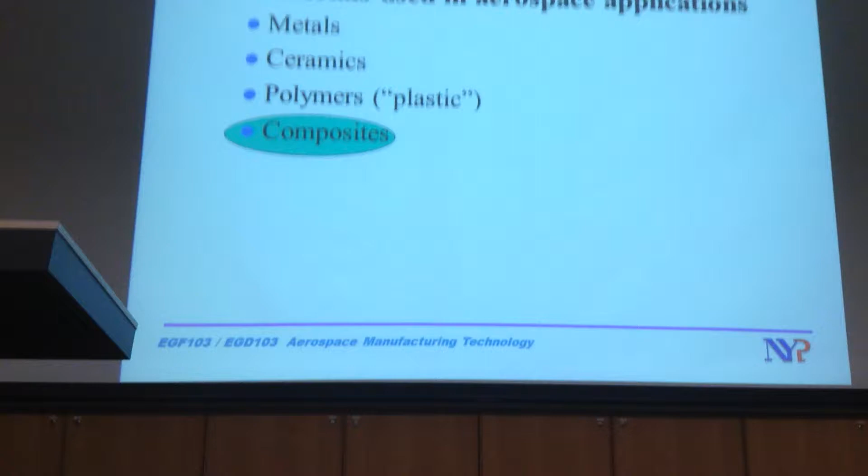Composite materials: normally when you want to build something, that product is called a structure. The product is a structure, okay? And then the material we use is composite materials. A composite material can be just like a sheet of paper, okay? And then you use that paper to construct it into a structure.

Okay, and basically composites are materials that consist of two or more constituents. Okay? And what we are interested in is the properties of the combinations of the materials. Okay, we are taking the best of each of the materials, the best properties or characteristics of each of the materials.

Oh my gosh, it's so cute.

And there are many composites around us. It's not new. But for aerospace, the composite materials they use are very narrow. Okay, but for general composites, it's everywhere.

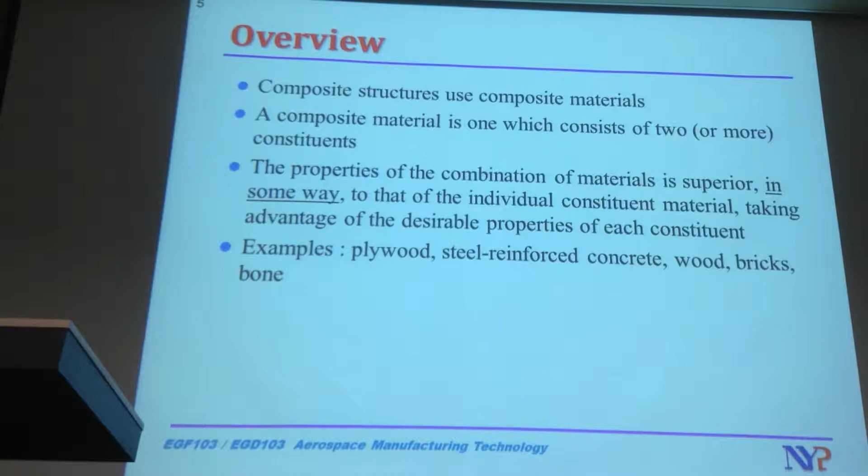A piece of plywood is a composite material. The bones inside our body are a natural composite. Okay, the tires they use for automobiles are a composite material. In fact, it's a very complex composite material. Okay, everywhere is composite material.

So for aerospace, if you are just looking at aerospace, the usage of composite materials has increased a great deal. Okay, starting from 1975, only very little composite material was used.

Hey babe, we should walk through the bay a bit.

Only very little composite was used in the 70s. Okay, progressively until now. Okay, the 787, the Dreamliner, has 50% composite materials.

What's the Boeing 787 in the chart? Hey, wait.

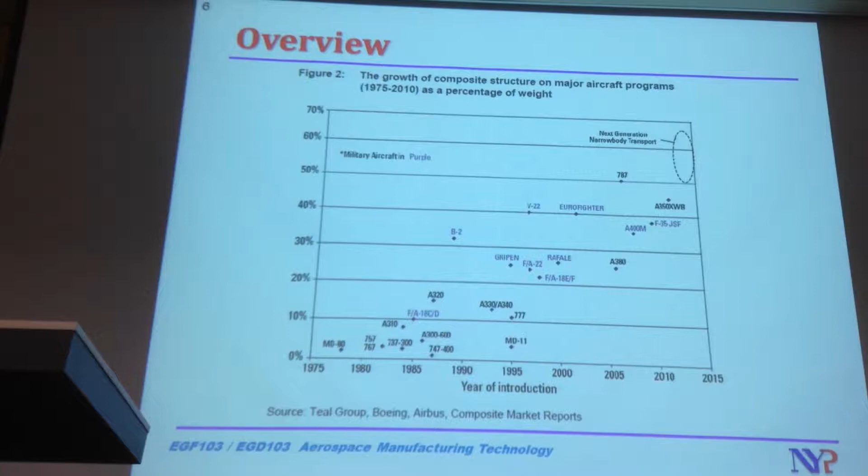Okay, 50%. So you can expect what happens to you if you were to take the plane and then it bursts into fire. Okay? Or if there is a crash. If you crash with the old plane, more likely the passengers in the old plane have a higher chance to survive than in the high-tech one. Because of a lot of composite materials.

Composites are more fragile. Fragile, yes. When you see a Formula One car crash, it just disintegrates into pieces. And then if there is a fire, it turns into ash. Is carbon fiber alone a composite? No. The definition is two or more materials put together.

F1 cars use carbon fiber. Yes, the reinforcement is carbon fiber, but they need glue to put them together. Then it becomes carbon fiber plus the glue, the epoxy, and it becomes a composite material. And they are using this type of material on the plane.

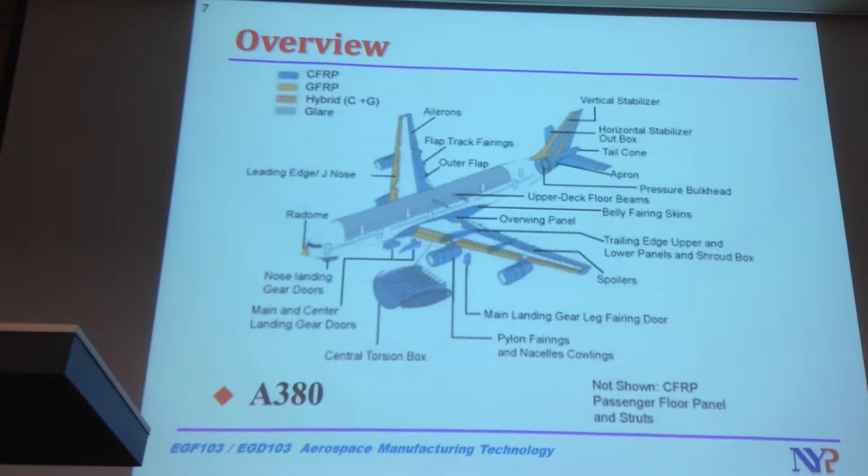Okay? So, yeah, your notes have no color. What the hell? Okay? But if you want to look at the color, you must go into the blackboard.

CFRP, carbon fiber reinforced plastic, is in blue. So let's look for them. Okay, quite a lot. I know how many seats are inside: 583, including the pilot. Carbon fiber reinforced plastic, and then we have GFRP.

I think 3 is for the pilot. Plus minus 5.

Glass fiber reinforced plastic, less. Because it's less strong compared to carbon, and is heavier than carbon fiber. Fiberglass is heavier than carbon fiber. Look at the fiber tip, it's random. So random.

And then there are some areas that may be hybrid. Hybrid means that one layer fiberglass, one layer carbon fiber, then one layer, they just add on like your plywood. Several layers, alternating.

Winnie the Pooh. He wants to give Winnie the Pooh a facial.

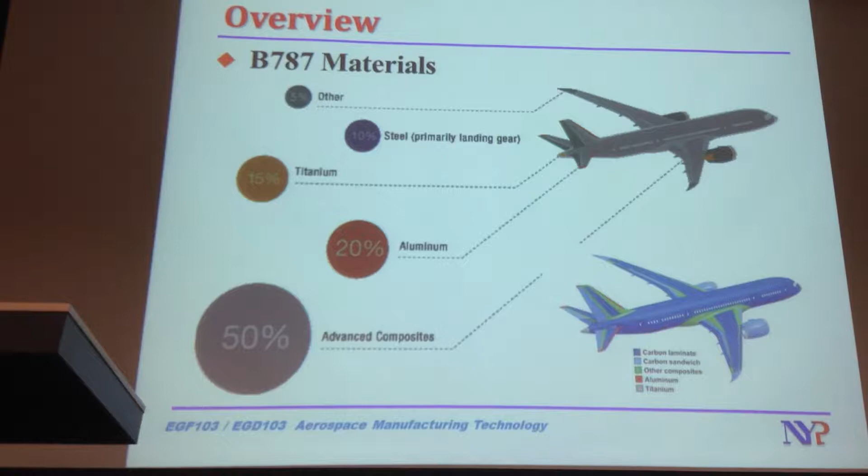Okay, we go to the difference between carbon laminate and carbon sandwich. I mean, not the so direct one. That means it could be a sandwich, or could be a hybrid, or something like that. Not so straightforward like carbon fiber or glass fiber. It could be with something else. There's a term for that.

If it's not that heavy, then how much would it take to lift it? Very funny. Depends on the thrust. No, I mean, what kind of machine would it take to lift it to the plane? This one, it looks big, but not as heavy as you can imagine.

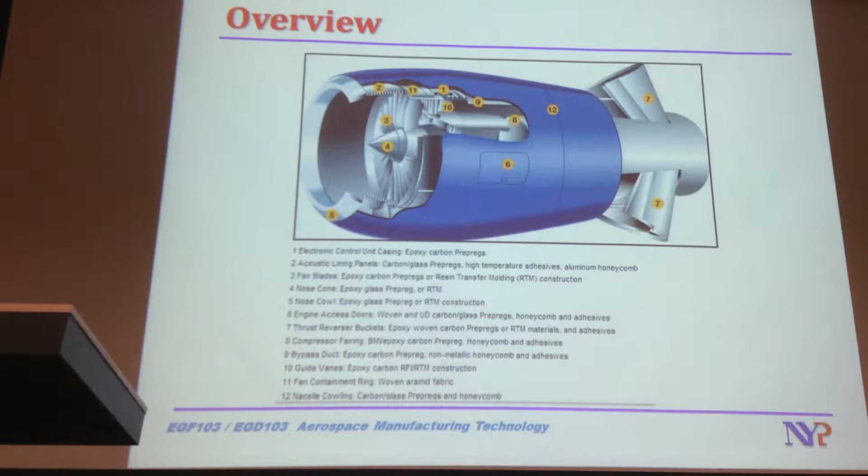So for plastic parts, we treat it like metal parts as well. We have to look at what properties we require, then find a suitable material for it. Sometimes we want it to be high modulus, that means very stiff. Sometimes we want high tensile strength. Most of the time we want a low density, because lightweight. Most of the time they use composite material because of the lightweight. The main reason to use composite material is they want it light.

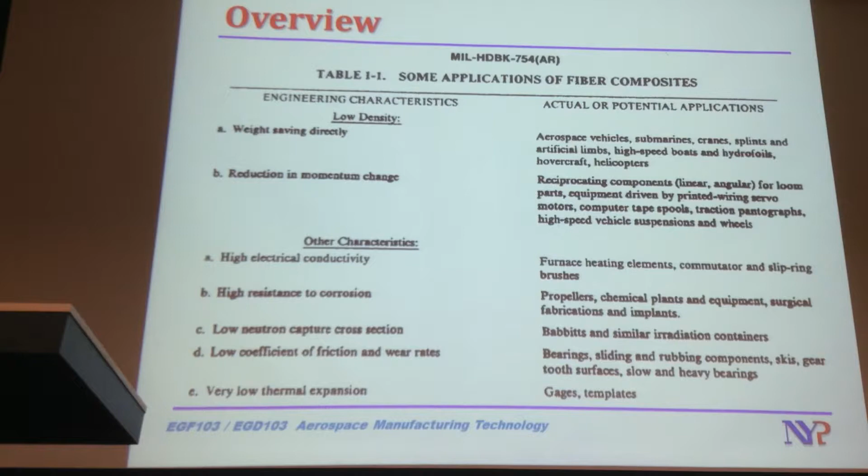Okay. So what are the advantages? Okay, I must apologize to D2. D2 will have tutorial on Thursday, so they have not seen the composite material, whereas the other two groups have seen it. Deformed already. This is the diamond made by the carbon fiber. See this diamond.

They are very light in weight as compared to steel. Even compared to other materials, it still feels very light. Strength and stiffness can be tailor-made to meet the load. That means if you know the load is from this direction, you can put your fibers to face the load. Higher performance for given weight leads to fuel savings, excellent strength to weight and stiffness to weight ratio.

Okay, a greater variety of mechanical properties. I think that one is a circle. It's a parallelogram. Yeah, I think it's a parallelogram.

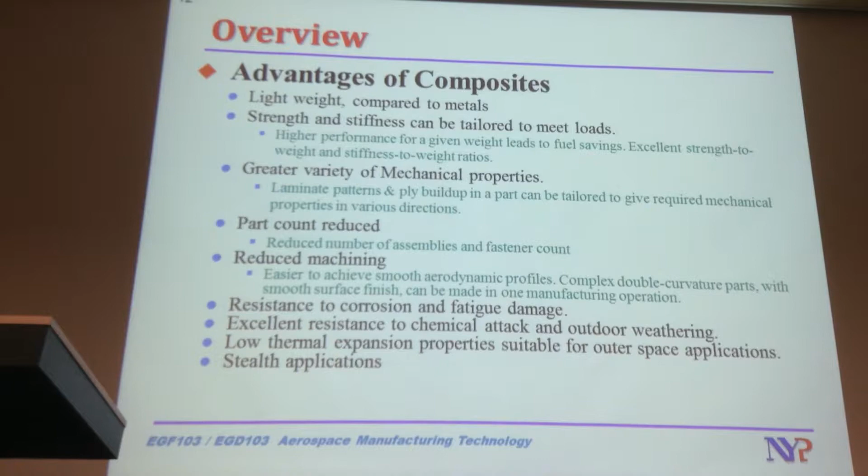Laminate patterns and ply build up. Ply, as in plywood. You know plywood? Plywood is made up of plies, layers, either 5 plies or 7 plies or 9 plies, 3 layers. Ply build up means we stack it up one after another, something like plywood. The build up in the part can be tailored to give required mechanical properties in various directions.

So how do we do it? Simply alternate the ply direction. I will show it to you in a diagram afterwards. Then part count is reduced. That means you are building big parts. If you compare to metal ones, the part count will be lesser. And machining will be reduced.

Basically composite material, which is plastic, is resistant to corrosion and fatigue damage. Fatigue is breakdown after long use from vibration. Okay, excellent resistance to chemical attack and outdoor weathering, because the plane is built to work outdoors, isn't it?

Is there a plane that is built for indoors? I mean, at least for the model toy plane, yes, they're built for indoors. But commercial planes are all built to fly outside. Yeah, correct. Okay, it means outdoor is important, because it's subjected to temperature change, subjected to humidity, and so on.

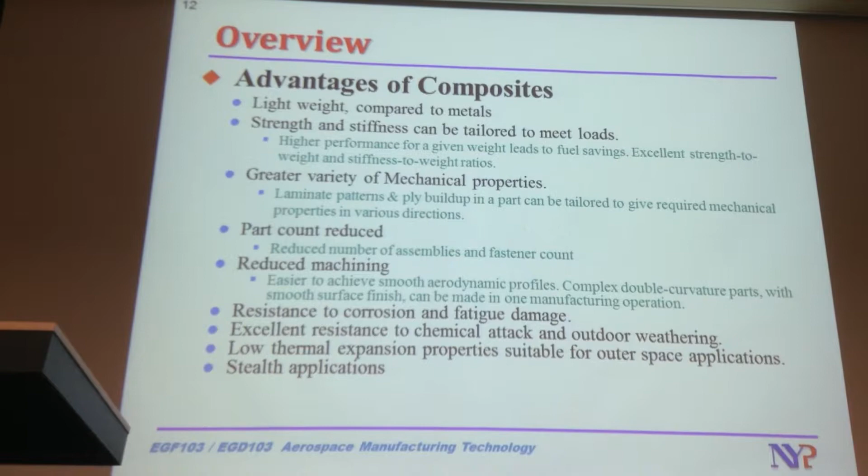Very low thermal expansion properties, suitable for outer space applications and stealth applications. That means it can evade radar. Okay. And then the disadvantages. You seldom see a material where the disadvantages are more than the advantages. Just composite material. Long list of disadvantages.

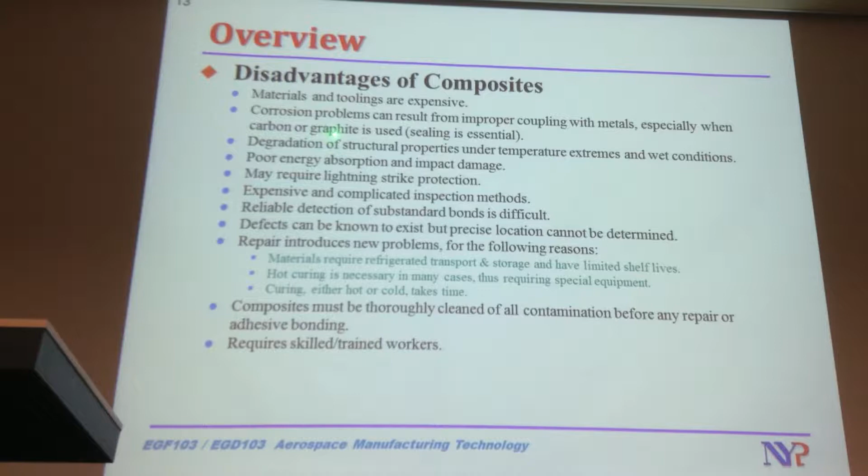If you use carbon fiber and you couple it with a metal, that means if you have a metal that contacts the carbon fiber, then over long use, under some weather conditions, it may cause corrosion to take place for the metal. Don't touch my back. Okay.

Degradation of structural properties under temperature extremes and wet conditions, poor energy absorption and impact damage. If you have a crash, it will shatter. May require lightning strike protection. Is there lightning strike protection in the plane? Yes, to conduct away the lightning. Yeah, there are several. Expensive and complicated inspection methods.

Reliable detection of substandard bonds is difficult. Because when you glue it and you want to see how good the joint is, how do you check? Break it. You break it, that means you never produce the part. So they have to use NDT, non-destructive testing. Sometimes the tool they use is very simple, a tiny little hammer, and they tap on the surface. From there, they can detect whether the part is properly bonded.

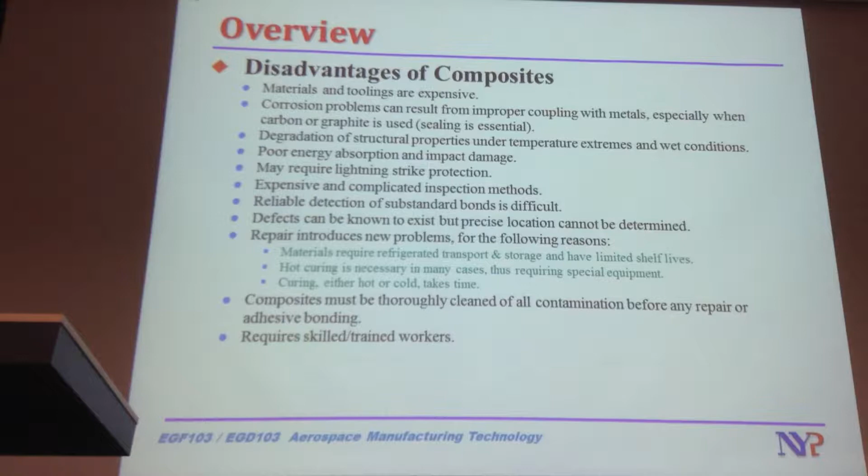And worse still, when you make a repair, the repair makes the job even worse. It can happen for composite materials. And you have to clean it properly before you can use any glue. Then you need very skillful people to work on composite materials. But when I show you the video on composite materials, if it's not in aerospace, it's not so strict. But in aerospace it's very strict when they handle these composite materials.

The resin must be approved by either Boeing or Airbus. It must be approved. Fiber also. And then from a fiber, which maybe looks like a cloth, and the glue, you can make it into products, like this I-beam structure or whatever structure.

So how strong is your composite structure? Or I ask, how strong is the pillar that supports the building? It depends on the properties of the structure and the material you use. One of them is the properties of the reinforcing fiber. If you are using the bar to put inside the pillar, what diameter are you using and how many rods do you put inside? It's important to determine the strength.

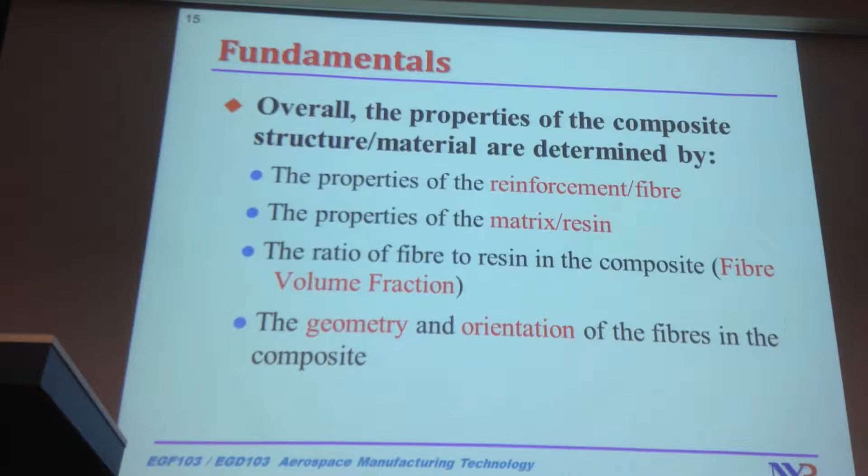Which way you put the fiber plays a part. Which way you orientate the fiber, whether you lay it this way or sideways, plays a part in aerospace. Imagine your fiber is made up of all these lines. This is called a certain angle. For example, I call this 0 degrees. The next one, if this is 0, is 45, isn't it? Then after that comes 90, right? And so on.

In this way, you can make the part very strong in all directions. If you want strength in only one direction, you put all the long fibers to face that direction. But if you have too many layers, say 20 or 10 layers, it becomes thicker but also heavier, and it becomes very, very strong.

But sometimes we don't need that much strength, we just need it to be thicker. In this case, we put a honeycomb in between, which gives you thickness without the weight, then a layer of laminate, or two layers, on top and at the bottom.

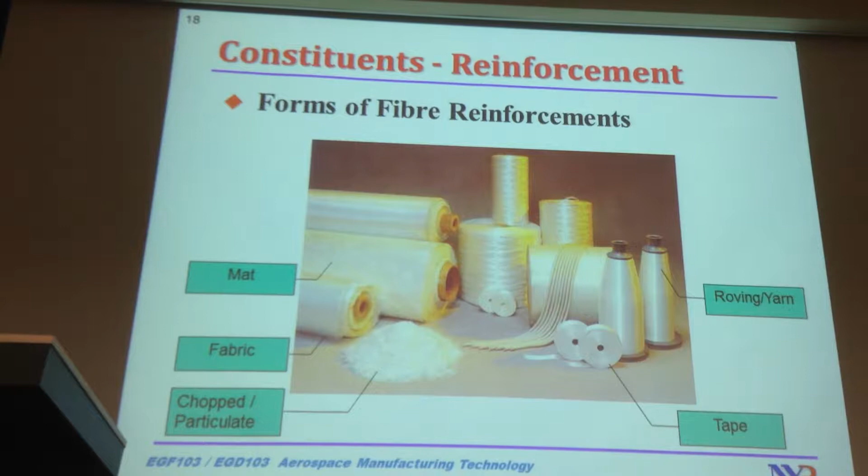So fiber can be of three types for aerospace. We have the aramid, that means Kevlar - the strongest one, which they use for bulletproof vests. It doesn't mean that one strand can stop a bullet, no, it needs other things as well. Then we have carbon fiber, then glass fiber.

So what is the typical characteristic of a sandwich material? Sandwich means we have a honeycomb in the middle. For those who had held the floorboard that I passed around the last two days, was it very light? Yes, everybody agrees it's very light and has high flexural rigidity. When you try to twist it, it resists your twisting, isn't it?

And then it's excellent in thermal insulation - it can withstand heat, not strong fire, but heat.

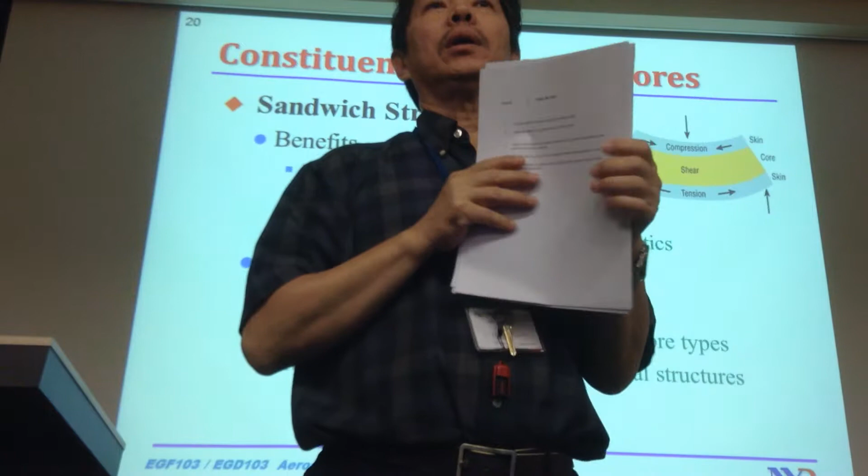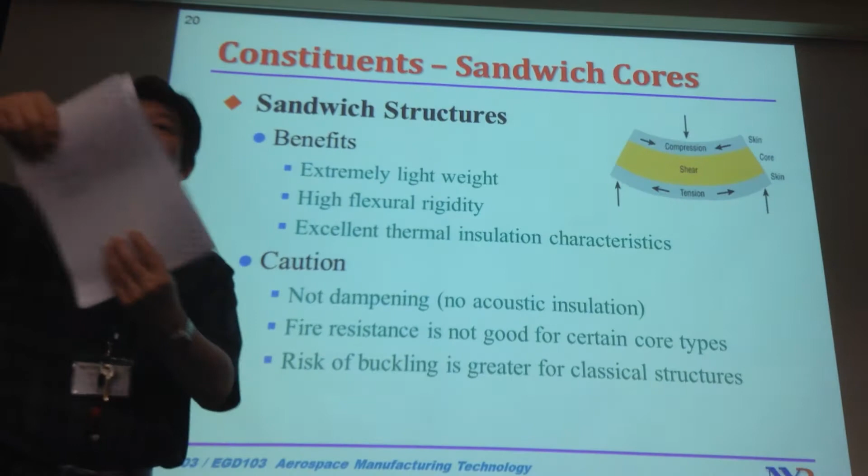But if you exert the load this other way, it may buckle. You know buckle? Something like crumple. For long bars, if you press on both ends, it may bend and buckle, bend and break. So it's no good - you cannot use the sandwich material as a support for the load.

So the honeycomb can be metal or non-metal. The metal one can be aluminium, titanium, stainless steel, or whatever material. Then it can also be paper ones - paper is aramid paper, they call it Nomex.

And all these are no good for sound insulation - if you have noise, it will just go through. If you want some insulation effect, you may use foam, like those that contain food, the white color one. If you put the foam in between two laminates, it may absorb some noise or sound.

Actually, I've not seen one. I worked with it back in secondary school. Balsa wood, like foam. You can leave your fingernail mark in it, it's soft wood, like foam wood. But it's wood, not plastic. I didn't know it was actual wood at first, I think it's wood dust made into this. Okay, Balsa wood.

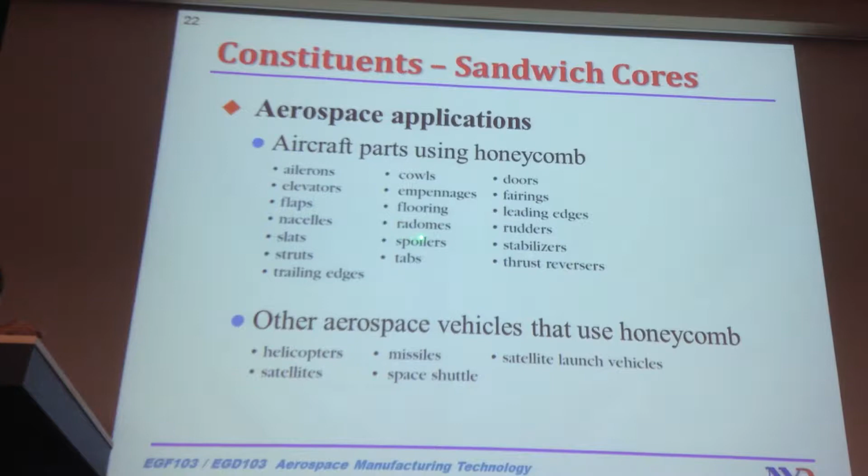What else do you know? Radome, what is a radome? The nose, it's simply the nose of the plane. It's a cover, actually the nose is a decorative cover, just a decor. So how come the actual nose is flat? At the end of the plane, actually, it's a flat one, so they put a nose cover there. But why would it be? Of course, because of the radar and so on that they put there, a lot of detectors in the front. Then to protect all these detectors, they put a cone there, they call it a radome.

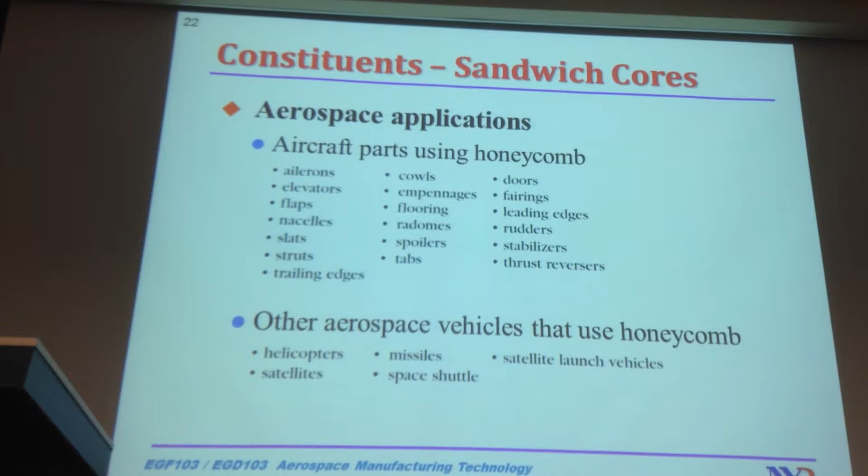Aesthetics. Okay, then you can also use it for outer space, for helicopters, space shuttles, satellites, and so on. Okay, I'm going to show you a highly technical video on composite manufacturing, everything about composite.

What you will see is not 100% aerospace, just a little bit aerospace. Composite can be used anywhere, for ships, for bicycles, for golf clubs or whatever. They are not all aerospace, just a little bit aerospace only.

Composite manufacturing series, examining the materials, tools, and techniques used for composites fabrication. This program is an introduction to composite materials. Composites are materials combining at least two distinct materials, which together provide superior performance and/or lower manufacturing costs.

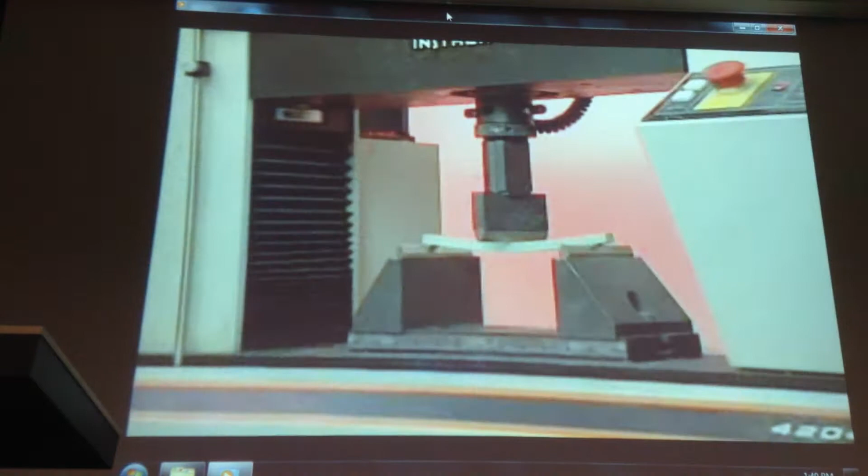Fiber reinforced composites consist of a reinforcement material and a matrix, or base material. The reinforcement's function is to improve the mechanical properties of the composite and is typically the main load-bearing element. The matrix functions as a binder for the reinforcement and controls the physical shape and dimensions of the part. The primary purpose of the matrix is to transfer the load or stress applied to the composite to the reinforcement. The matrix also protects the reinforcement from adverse environmental effects.

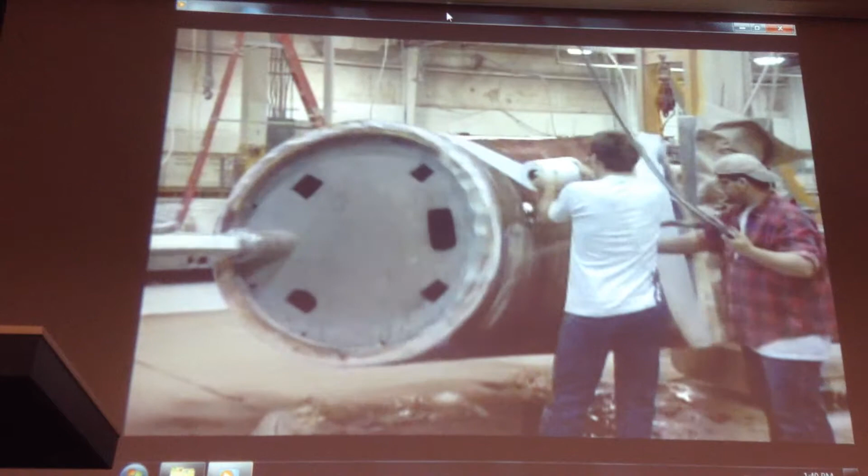Of the several types of composites, fiber-reinforced composites are the most widely used for structural and non-structural applications. The most common and widely used fiber-reinforced composites are fiber-reinforced resins or polymers, commonly referred to as polymer matrix composites, or PMCs, or even simply as reinforced plastics. These composites are typically lightweight, strong and rigid, provide high strength to weight ratios or specific strength, and high rigidity to weight ratios or specific stiffness. Another major advantage is that fiber direction can be oriented to suit the applied load direction.

Applications for polymer matrix composites include automotive and performance racing parts, boat hulls, aircraft components, and many more.

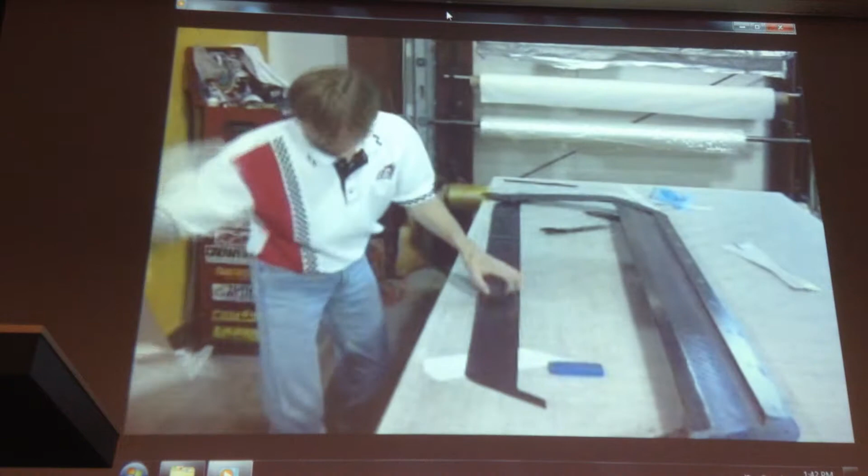Besides being available separately and combined in fabrication, reinforcement fibers and matrix are also available together in what is called pre-preg, or pre-impregnated material. Pre-preg combines partially cured resin with fibers and must be kept refrigerated prior to use to inhibit further curing. Use of pre-preg simplifies and speeds composite layup and ensures higher quality parts. Fiber and matrix quantities are more accurately maintained, providing more consistent mechanical properties. Both continuous and short fiber forms of pre-preg are available.

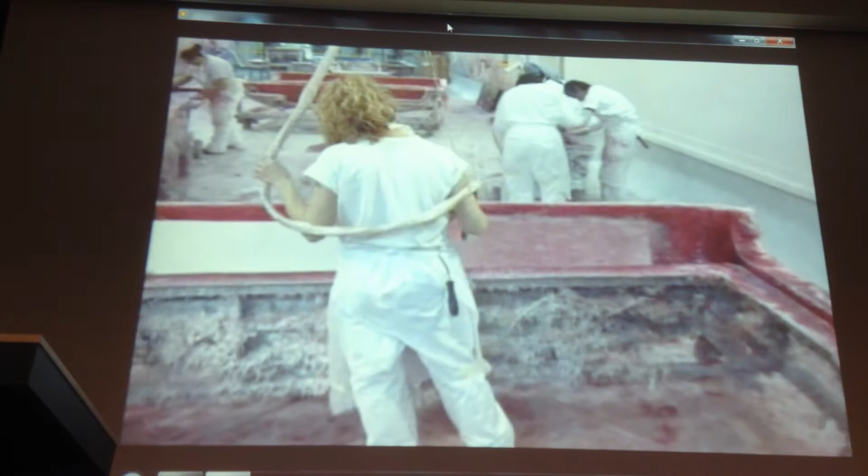An important structural aspect of polymer matrix composites are the tensile properties, since they are indicators of how a material behaves under loading while in tension. Three of the most important tensile properties for polymer matrix composites are tensile yield strength, tensile modulus, and ultimate tensile strength.

Tensile yield strength is the tensile stress required to permanently elongate a material loaded in tension. Tensile modulus is the ratio of tensile stress to tensile strain for stresses below the material's elastic limit. Tensile modulus indicates the material's stiffness or rigidity. Ultimate tensile strength is the maximum stress a material can withstand before rupturing.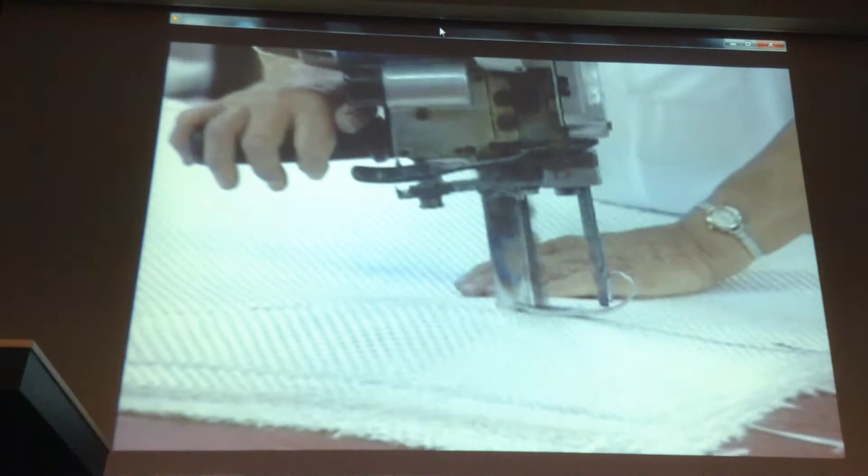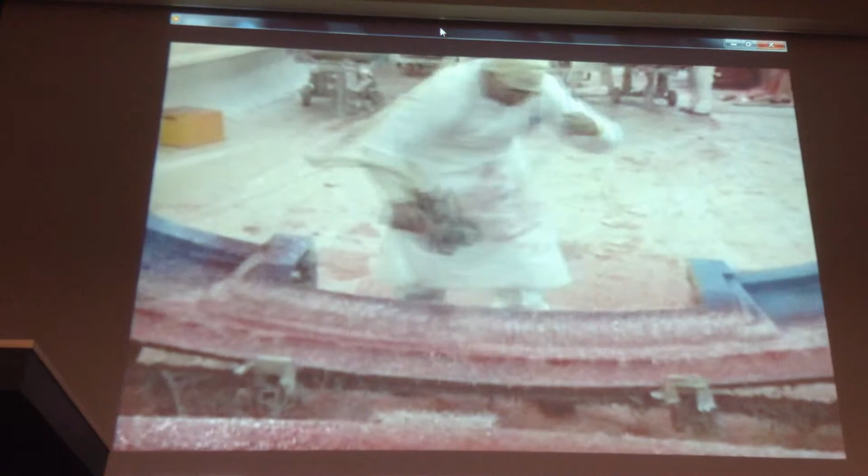The principal types of reinforcement fibers used for plastic matrix composites are glass, carbon or graphite, and aramid. The two primary types of glass fibers available for composites manufacturing are E-glass and S-glass. E-glass is an abbreviation for electrical glass borosilicate glass fibers. These fibers have high electrical resistivity, are inexpensive, and are the most prominently used in polymer matrix composites. S-glass, which is an abbreviation for structural glass, is a magnesia alumina silicate glass reinforcement fiber designed to provide very high tensile strength for composites. S-glass is about 30% stronger and 20% more rigid than E-glass, and is slightly lighter in weight. But S-glass is far more costly than E-glass.

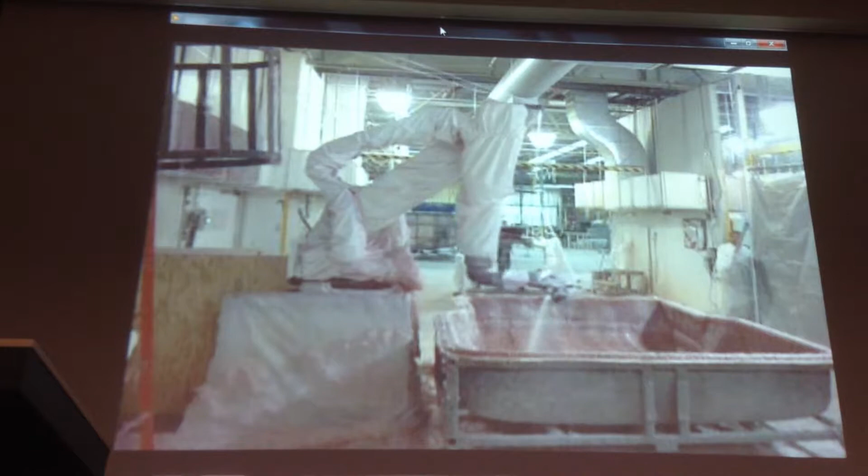All the glass fibers are heat resistant, retaining about half of their strength at temperatures up to 700 degrees Fahrenheit or 370 degrees centigrade. They are moisture resistant and corrosion resistant as well, except to strong alkalis and hydrofluoric acid. Glass fibers are produced in various commercial forms, including rovings, which are a group of parallel strands gathered in ribbon form and wound onto a cylindrical tube. Other commercial glass fiber forms include chopped strands, yarns, and woven or non-woven fabrics.

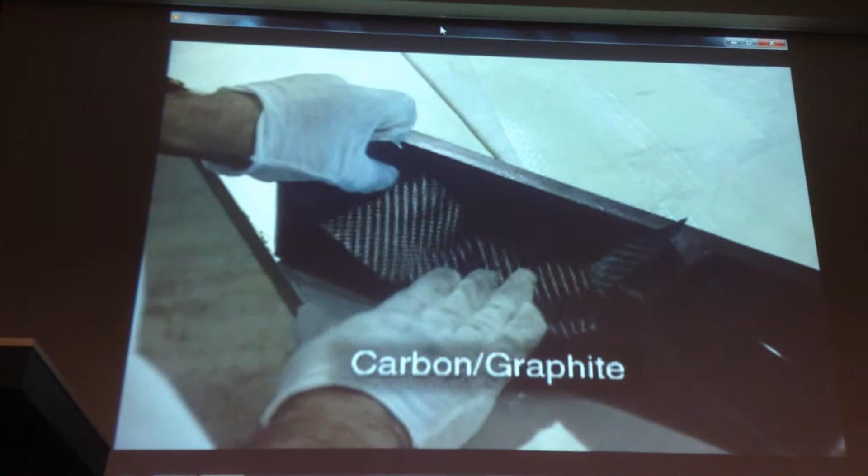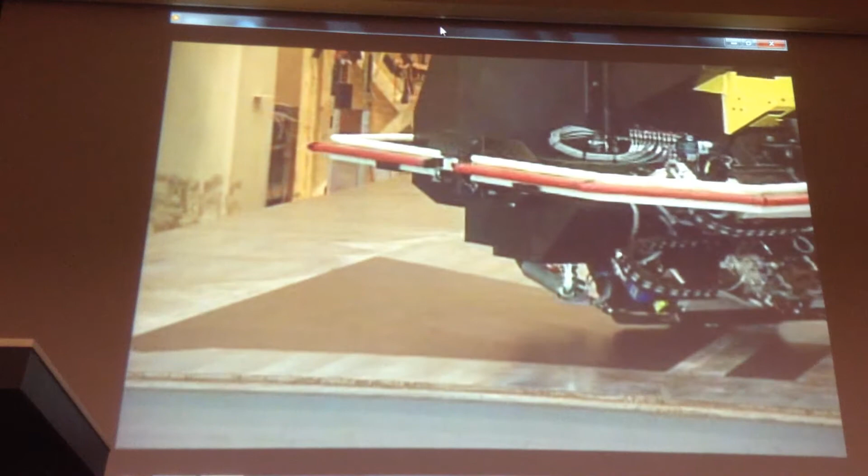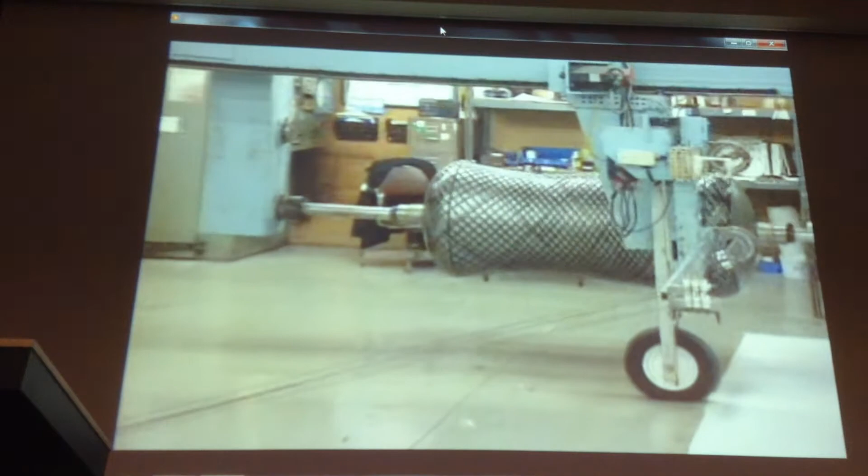There are two principal carbon or graphite fibers used for plastic matrix composites: PAN carbon, which is the more common and much more costly, and pitch carbon. Both PAN and pitch carbon fibers are lighter in weight than glass fibers, but heavier than the aramid fibers. Their density ranges from 61 thousandths to 76 thousandths pounds per cubic inch, or 1.7 to 2.1 grams per cubic centimeter. The heavier the carbon fiber, the greater its tensile modulus, ranging up to 75 million pounds per square inch, or 517,000 megapascals. Tensile strength ranges from 220,000 to 820,000 pounds per square inch, or 1,520 to 5,650 megapascals. The carbon fibers are extremely brittle, having a strain to failure of only 0.3 to 1.8%. They are, however, quite heat resistant, having maximum service temperatures as high as 1,000 degrees Fahrenheit, or 540 degrees centigrade.

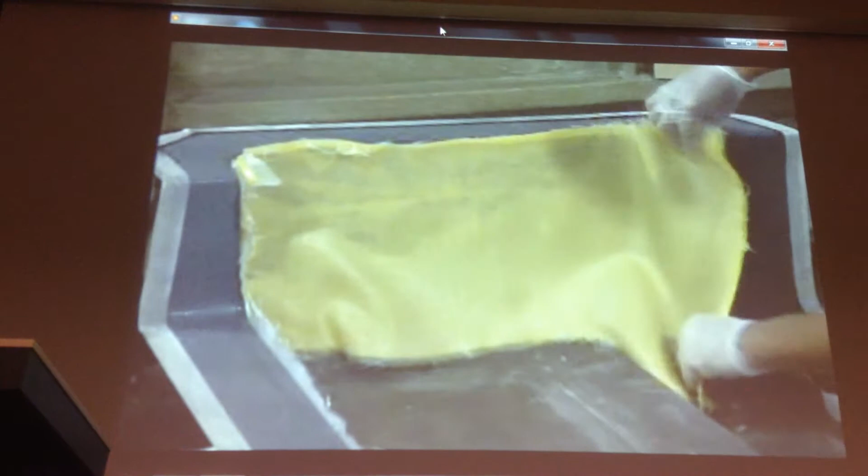The aramid fiber is much lighter than the glass. Its tensile strength can match that of the glass, and its tensile modulus can be much greater. Its strain to failure is 1.9 to 4.4%, and its coefficient of thermal expansion lengthwise is negative, which permits making composites of zero or near zero thermal expansion. Aramid fiber has limited heat resistance, and its compressive strength is low. Resistance to ionizing radiation and chemicals other than high concentrations of strong acids and bases are excellent. However, prolonged exposure to light and ultraviolet adversely affect mechanical properties.

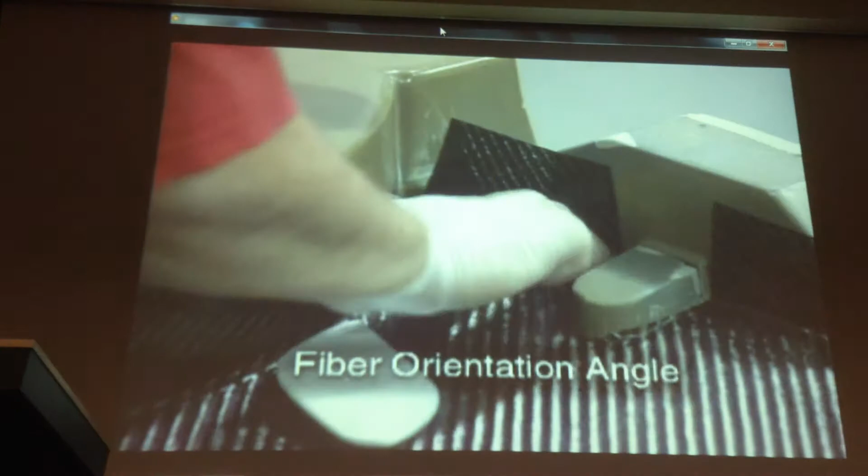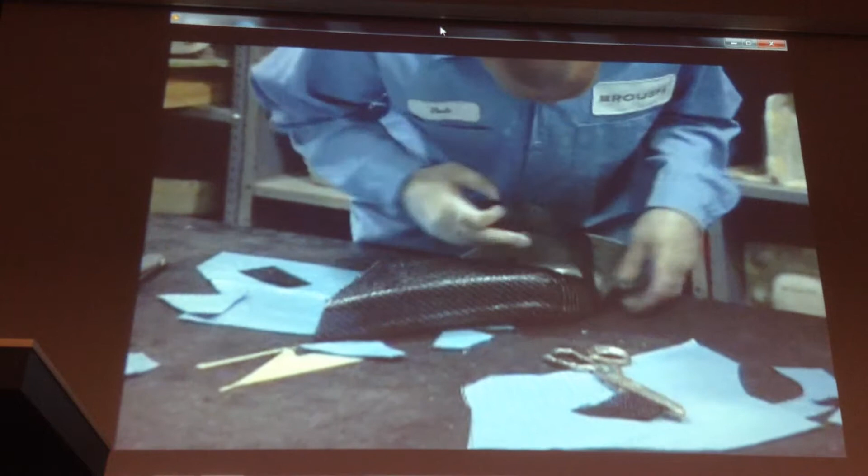Two important parameters governing overall properties of reinforcement materials for plastic matrix composites are fiber orientation angle and fiber architecture. Fiber orientation angle is the angle of the fibers relative to the loading direction, for example, 0 degree along or parallel to loading, 90 degrees transverse to loading, and plus or minus 45 degrees for such angular placement relative to the loading direction. Fiber architecture pertains to fiber arrangement, which can be linear, two-dimensional, or three-dimensional. In linear form, the fibers can be continuous or discontinuous. With continuous fibers, orientation can be precisely controlled. With discontinuous fibers, little, if any, orientation control is possible.

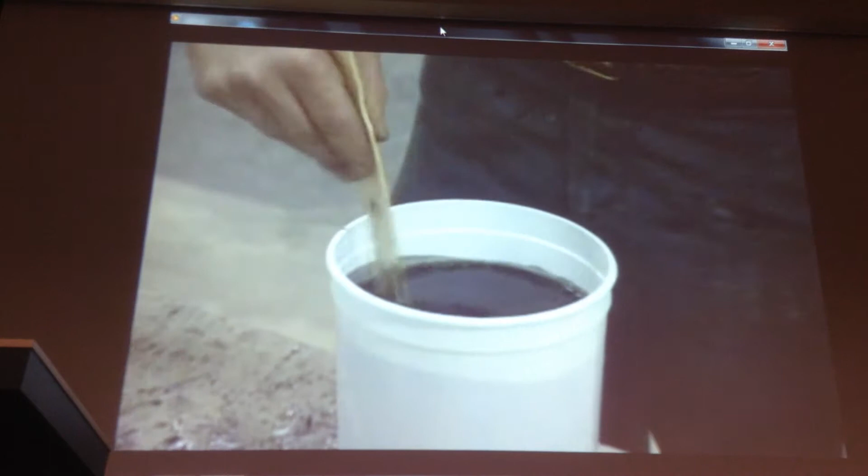Three-dimensional arrangements contain continuous fibers that are interlaced, intertwined, and interlooped. These materials provide good control of fiber placement and orientation and can be used to produce complex shapes. The matrix materials for fiber-reinforced plastic matrix composites can be thermoset resins or thermoplastic resins, with the thermosets being the most widely used.

Is that like plastic?

Thermoset resins require curing to develop their desired mechanical properties. Curing may be at room temperature or with an open-air heat assist.

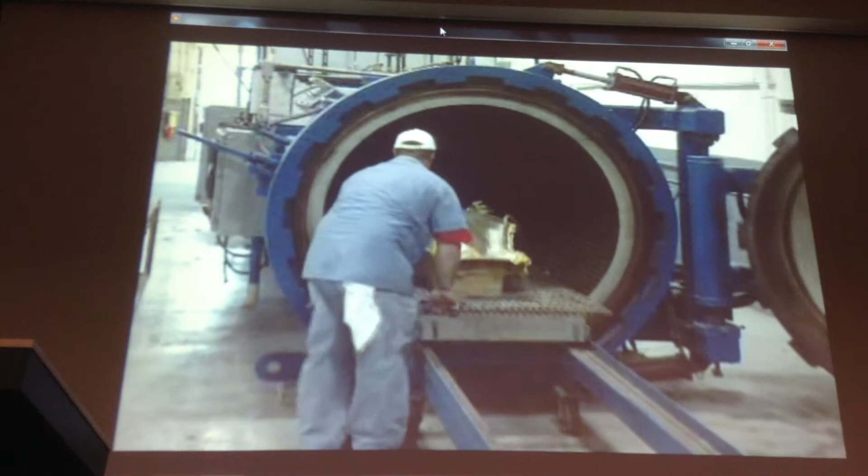Curing is also achieved using heat platen presses, dies, ovens, or autoclaves. Once cured or set, thermosets cannot be reprocessed. Curing cycles for composites can be long, ranging from an hour to half a day or more. The process is typically faster in presses or dies than in ovens or autoclaves, but ovens and autoclaves can accommodate much larger parts or many small ones.

Thermoset polymers are generally more thermally stable and chemically resistant, less costly, and with a few exceptions, more heat resistant than the thermoplastics. Looks fun.

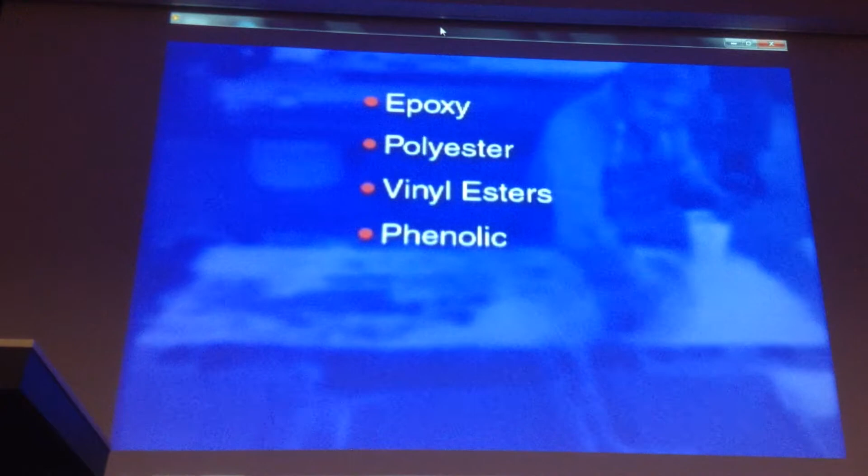Some of the primary thermoset matrix materials are epoxy, polyester, vinyl esters, phenolic, cyanate esters, bismaleimide, and polyimide. Of these matrix materials, the epoxies have found the greatest use in high-performance applications, including marine, aircraft, and aerospace applications. Their principal advantages are processing ease, good mechanical properties, and low cost.

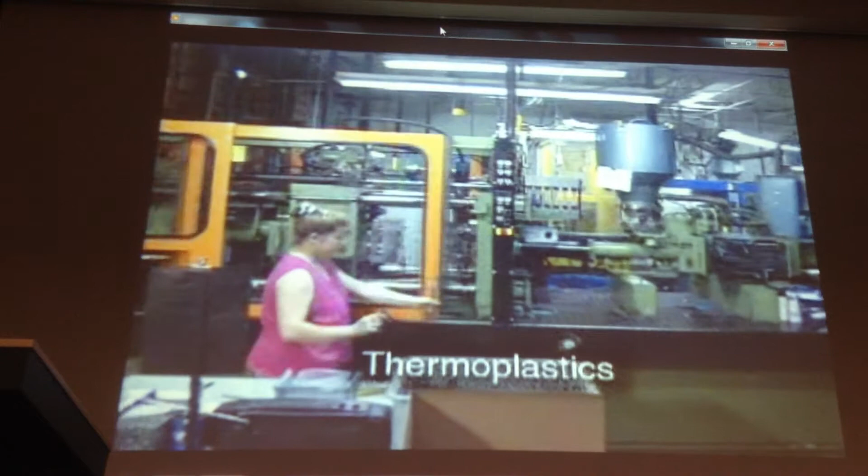Thermoplastics are less brittle than the thermosets, having a greater strain to failure or crack resistance, and higher impact strength or toughness. They also have unlimited storage life, are processed more quickly, can be softened repeatedly, and unlike thermosets, thermoplastics can be recycled for reuse.

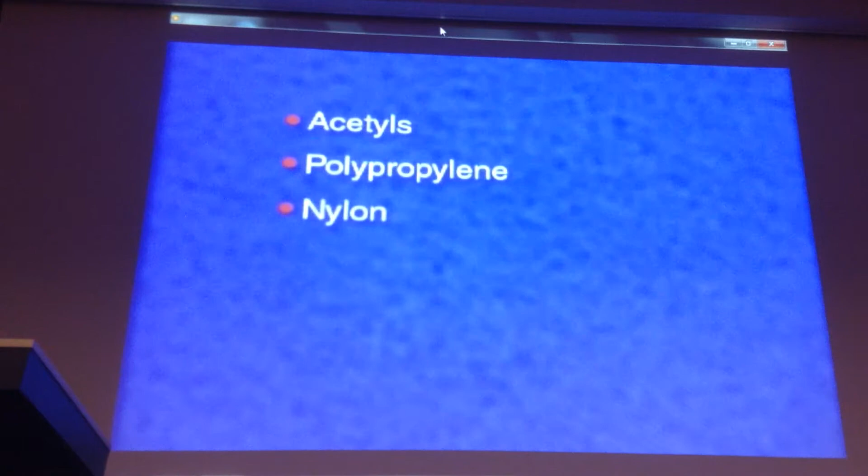Discontinuous fibers are more commonly used than continuous ones with thermoplastics, and injection molding is widely used for product manufacturing. The parts made of thermoplastics, however, are typically much smaller than those made of thermosets. Among the most common fiber-reinforced thermoplastics are the acetals, polypropylene, nylon, polyethylene terephthalate, polybutylene terephthalate, and polycarbonate. I can only say nylon.

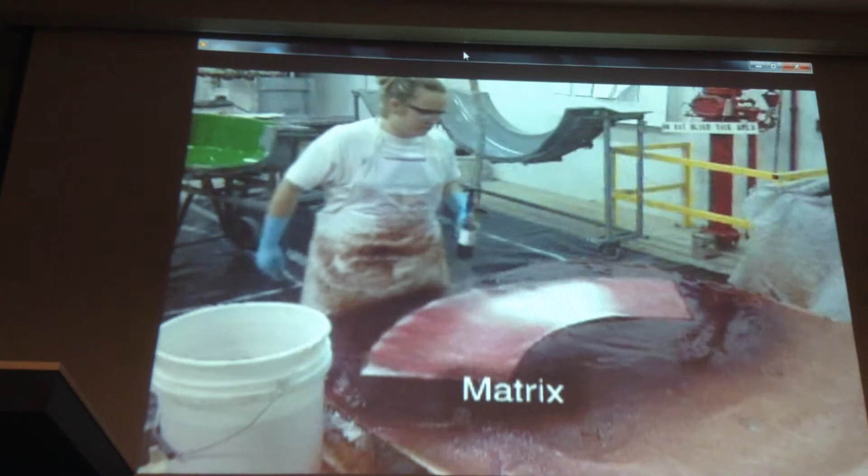Let's review the material contained in this program. Fiber-reinforced composites consist of a reinforcement material and a matrix or base material. The reinforcement's function is to improve the mechanical properties of the composite and is typically the main load-bearing element. The matrix functions as a binder for the reinforcement and controls the physical shape and dimensions of the part. The primary purpose of the matrix is to transfer the load or stress applied to the composite to the reinforcement. Oh yeah. The matrix also protects the reinforcement from adverse environmental effects.

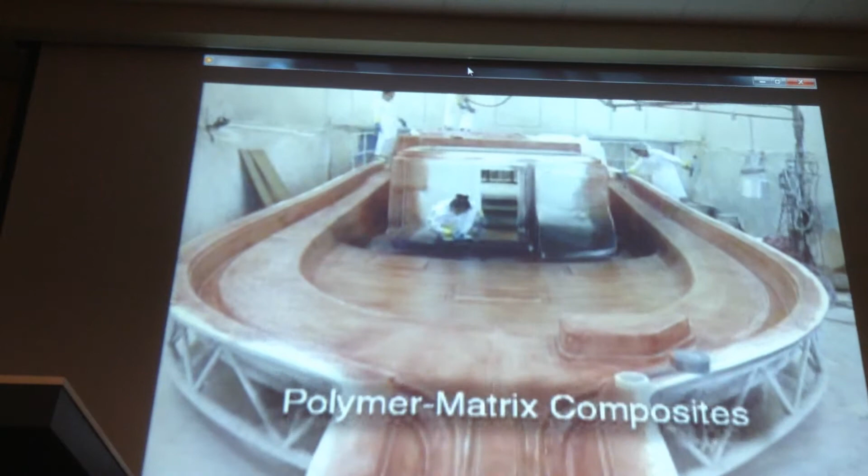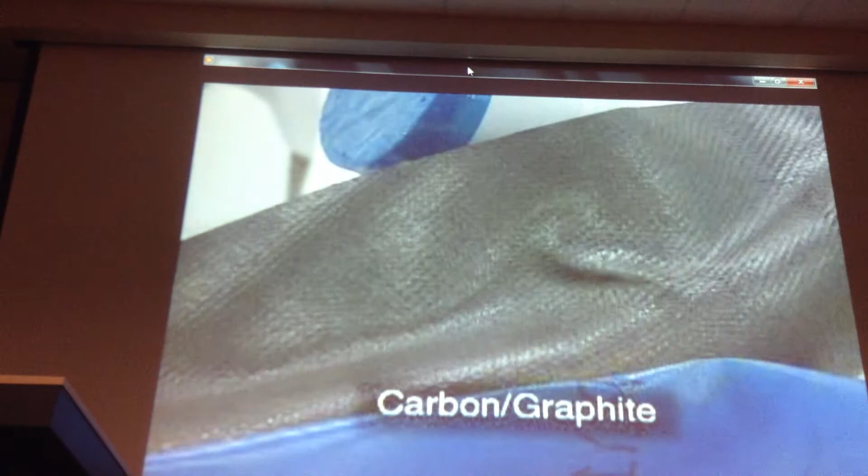The most common and widely used fiber-reinforced composites are fiber-reinforced resins or polymers, which are commonly referred to as polymer matrix composites or PMCs, and even simply as reinforced plastics. Besides being available separately and combined in fabrication, reinforcement fibers and matrix are also available together in what is called pre-preg, or pre-impregnated material. The principal types of reinforcement fibers used for plastic matrix composites are glass, carbon or graphite, and aramid.

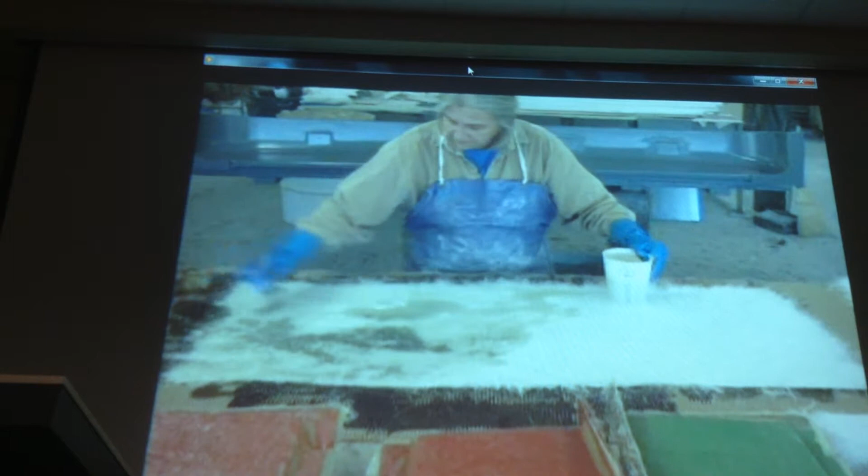The matrix materials for fiber-reinforced plastic matrix composites can be thermoset resins or thermoplastic resins, with the thermosets being the most widely used. Thermoset polymers are more thermally stable and chemically resistant, less costly, and with a few exceptions, more heat resistant. Some of the primary thermoset matrix materials are epoxy, polyester, vinyl esters, phenolic, cyanate esters, bismaleimide, and polyimide. Thermoset resins require curing to develop their desired mechanical properties. Once cured or set, thermosets cannot be reprocessed.

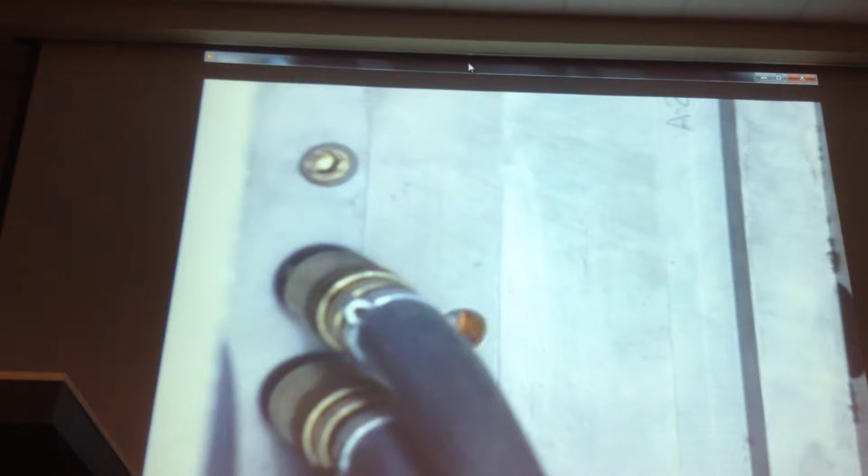Thermoplastics are less brittle than the thermosets, having a greater strain to failure or crack resistance, and higher impact strength or toughness. They also have unlimited storage life, are processed more quickly, can be softened repeatedly, and unlike thermosets, thermoplastics can be recycled for reuse. Among the most common fiber-reinforced thermoplastics are the acetals, polypropylene, nylon, polyethylene terephthalate, polybutylene terephthalate, and polycarbonate.

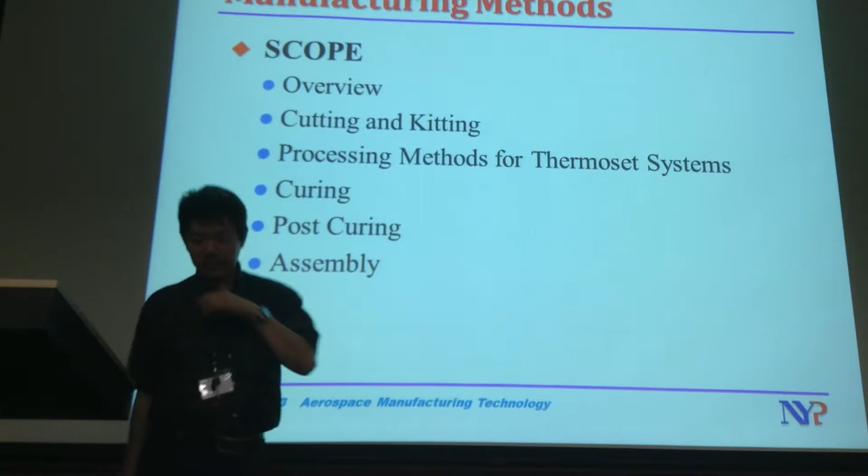Does it look high tech for composite manufacturing? It doesn't look high tech. You can do it on your own. If you want to do it, we simply buy some fabric and then we buy the glue, and then that's it, finished. We can start to produce our own fiberglass boats and so on. So high tech. Teacher takes this very easy. And actually the video is quite bad.

It shows that you need to observe safety rules. See the old ladies, maybe she had died already. When they do sawing of the cloth, they don't wear a mask. Then the fine particles are flying all over the place. When they're spraying the fiberglass, that one is bigger. But when they are sawing and cutting, it becomes very fine, small particles. The big ones are not so bad. The tiny little ones are the worst. When I went for training, I was made to put on the N95 mask for the whole day.

Okay. How you say? Hey dude, do you have this here in your notes? The first page. What the hell?

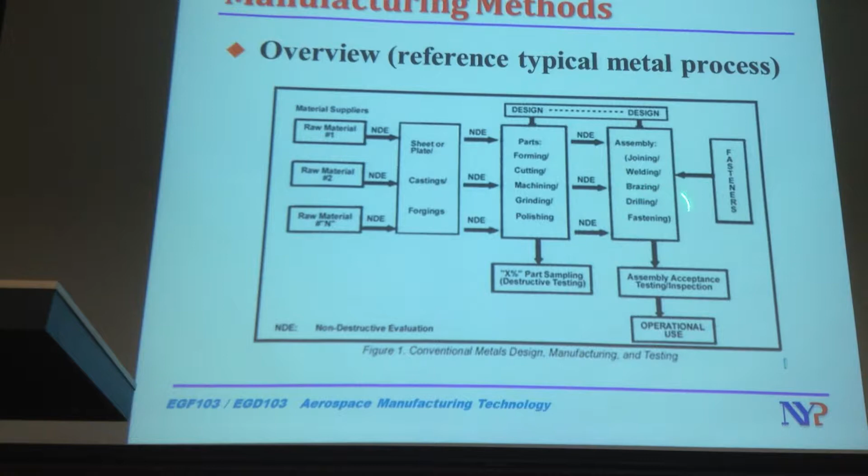For composite manufacturing, same thing. You can get from the supplier fabric, fiber, and resin, and then you fabricate your own parts, like the old lady was doing. You put the fiber there, you pour the glue, and then you manufacture your own parts. Or you can buy the ready-made one.

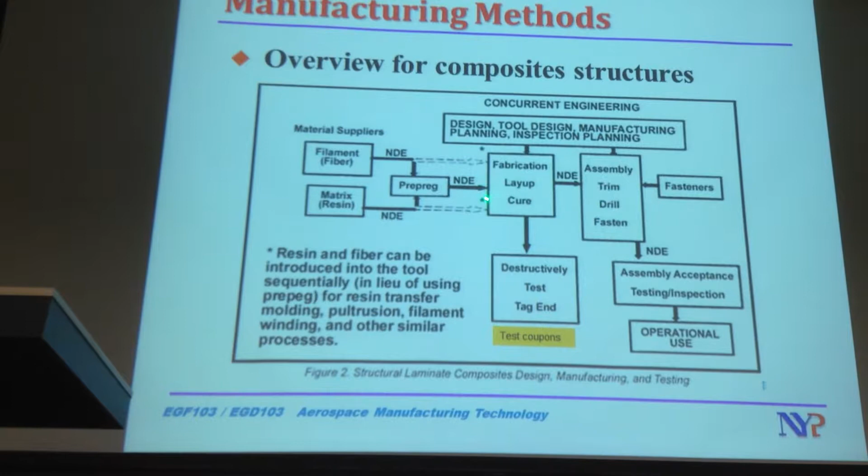Then we go for layup. Layup means you put on layer by layer, same as you use your erasing tape. When you make a mistake, you put one layer, not good enough, you put another layer, it means you are laying up layer by layer. And then after that, we may send for some testing if you want to.

And then we may do assembly, trimming, fastening, and so on to finish the part. Quite similar to the metalworking. We still need to do assembly, like fastening, bonding, and so on. So now we look at the processes of making composite structures.

Processing methods for thermoset systems. Cutting and kitting. Basically, to cut the fiber, is it very difficult? The cloth that I passed to you in the class looks like it's not difficult, but it is. If you use a normal pair of scissors to cut the fiberglass fabric or the carbon fiber fabric, because it's so hard, when the scissors try to shear it, just imagine that the fibers are all round rods.

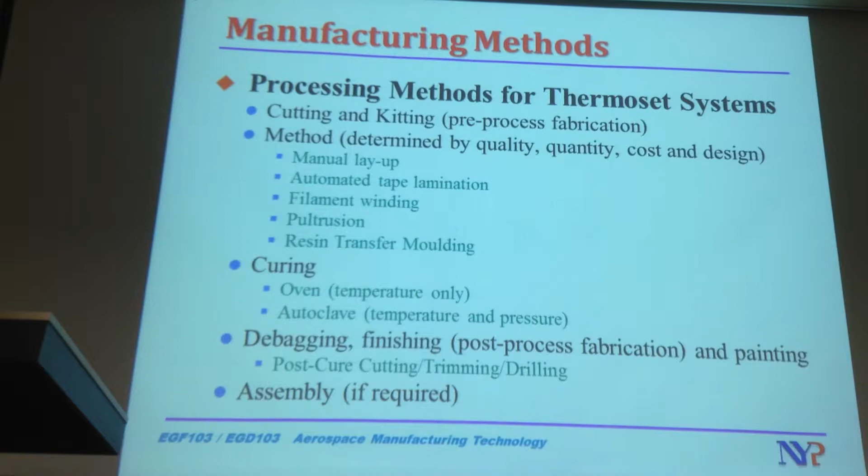Okay. And then debagging, a very interesting process. Debagging: remove the bag. Then finishing. Then post-process fabrication. After the part is cured already, you may want to paint it, you may want to do additional work. That is post-process. That means the part is cured already, hardened already. Then you do something, drill holes and so on. Painting, trimming, cutting, drilling, and so on.

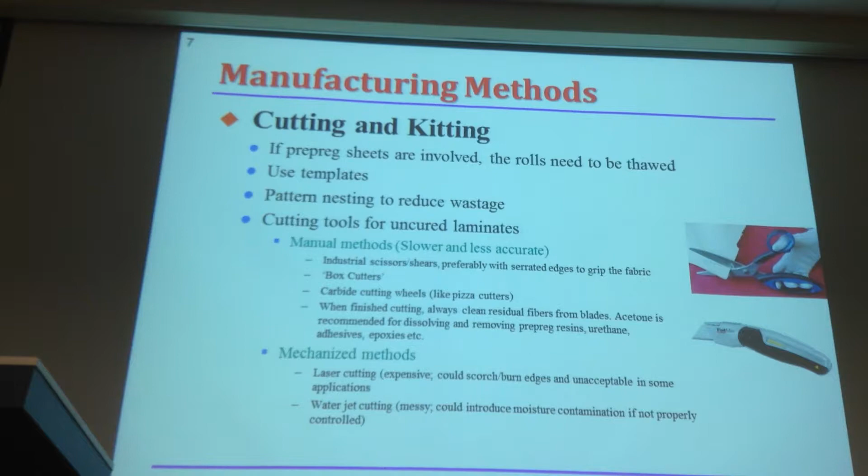So if you use that kind of epoxy, it will not last. It means after a short time, after tea break, you come back, it's gone already. The part cannot be used. You have to throw it away. So to reduce wastage of the material, we use pattern nesting. That means we lay out all the newspaper there first, and then we cut faster.

So, cutting tools for uncured. Uncured means the fabric has glue on it already. In this picture, it's only the fabric without the glue yet. Then after you pour glue on it, you spread the glue. Now if you want to cut it, it's more difficult, because it's cloth plus the glue plus the epoxy. So when you cut it, the glue will stick to the surfaces of the scissors.

Okay, how do you clean after? Very good. What is the best solvent to use? What solvent do we use? No, not kerosene, not turpentine. We use acetone, a commercial cleaning solvent, which is very good. It's found in nail polish remover. That one is very diluted. So you use concentrated acetone for industrial use; the commercial one is a very diluted form.

But isn't acetone also corrosive if concentrated? Not so.

Okay, so manually, for uncured laminates, that means the cloth with the glue, we can use a pair of good scissors, shears, or you can use an NT cutter. Do you know what an NT cutter is? We call this NT cutter, a paper cutter. You know why they call it NT cutter? Because the first one that came into use is the brand NT. You can buy it from the bookshop; NT is the better grade one. That's why you call it NT cutters. Actually, it's a paper cutter. Then this one is called a box cutter. Then we can use a carbide wheel, a pizza cutter.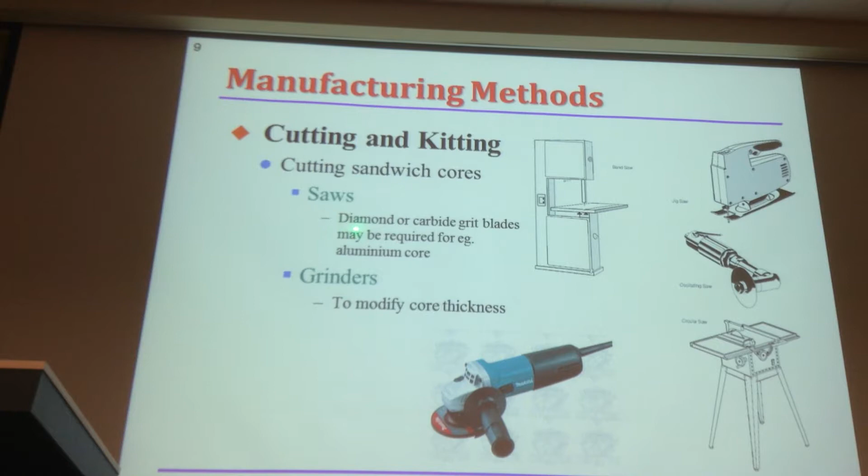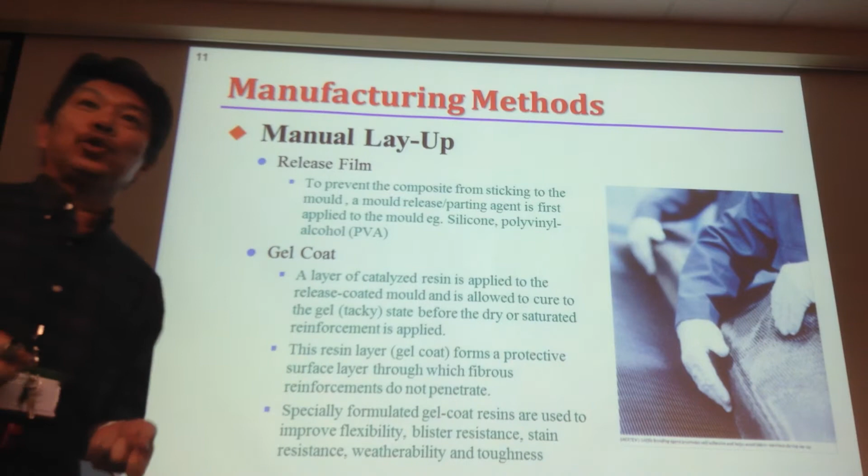Okay. Sorry, the release agent. Okay? To prevent the composite from sticking to the mold, a mold release or parting agent is first applied to the mold. Important. You know, you finish the part, you are very happy already, then you struggle to remove the part from the mold and the part is broken. Okay? So, this one is important.

So, there are a few ways of doing it, you saw in the video. The first way is I put the cloth without the glue. The cloth only, like this method, dry reinforcement fabric, means dry one. I put it on the mold, after it's in place, then I pour the glue there and then I spread the glue. One way. Okay? But it's only one layer, isn't it?

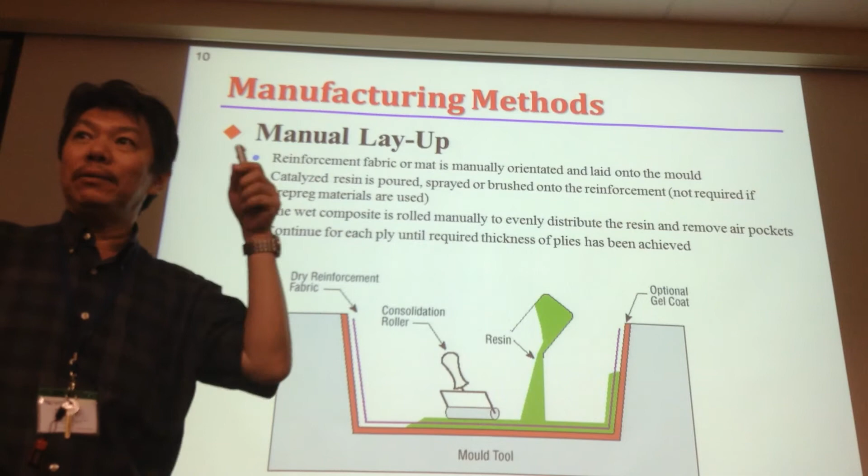One layer thick. Not thick enough, I put another cloth and then I spread some more. Not enough, I carry on third and fourth and fifth and sixth. Sometimes you may need up to 10 layers to get to the thickness that you require. Because one layer is about less than 1 mm, no? If you want 6 mm, you need so many layers already. Okay? One way.

Another way is I put the glue on the cloth. Already the cloth has the glue, and then I bring it there and put it inside the mold. Not enough, I take another one. I put the glue somewhere outside, I put it inside. It means the glue may be applied here, or may be applied outside before coming here.

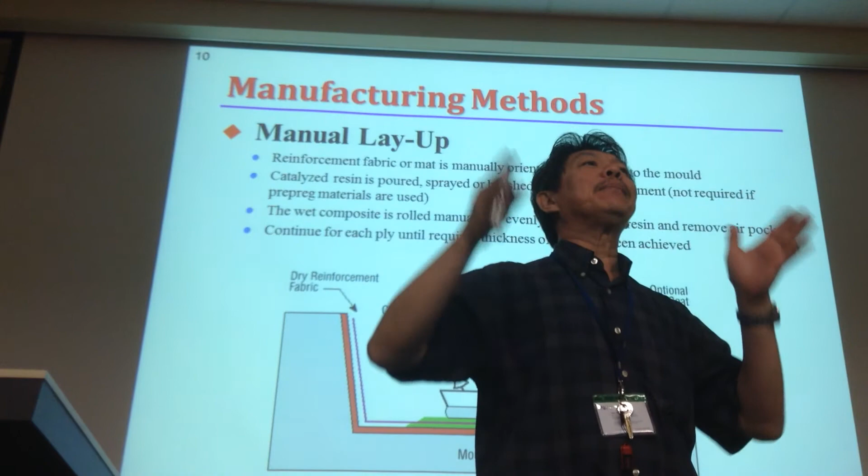Or another method is I don't make any glue at all. I buy the ready-made one. I buy the prepreg. Cut to the shape, come here, paste on it. Okay? This is how we do layup. Did you find it? Layup method. One layer after another.

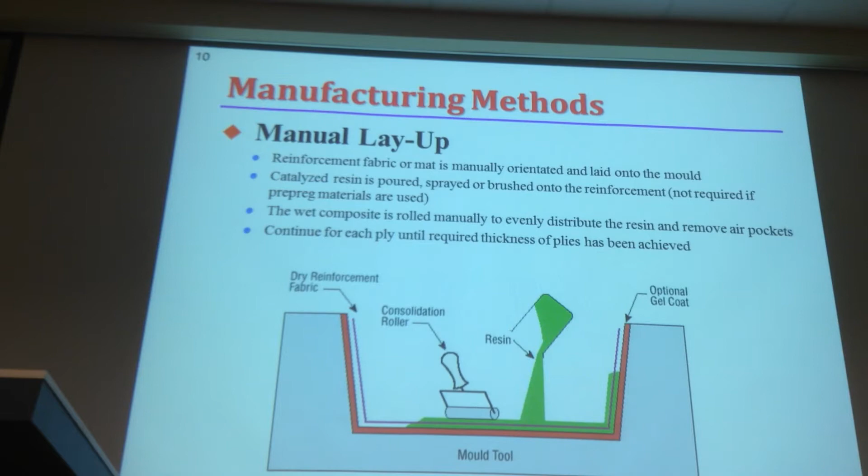That's how you saw the man held something in his hand in the video, and then he tried to build the part by laying up. Okay, with this method you can already make many structures or many products, but it may not be so nice because basically it's manual. Manual work. Is that clear? That is manual layup. Yeah, the release film must be there beforehand.

In the shipbuilding industry, or as we saw in the video, the orientation of the plies, that means layers, is not so important for the ship, for the bathtub or whatever. But for aerospace, it's very critical. They only tolerate less than 5 degrees error. So if you are going to put a cloth, first layer you want 0 degrees, you put. Second layer you want 45 degrees, you put.

How do you ensure that it's 45 degrees? Well, you can use a protractor to guide you. Not up to 1 degree accuracy, a few degrees is acceptable. But if you just ask somebody to estimate, he thinks that he's very accurate, isn't it? Every time I put, oh, this is 45, but it may be 30 only.

So, in the factory, this is actually what is happening. Whenever you put the first ply, somebody checks. The QC will check. After every ply, the QC checks, otherwise the second ply is not approved. This QC is checking at 2 places.

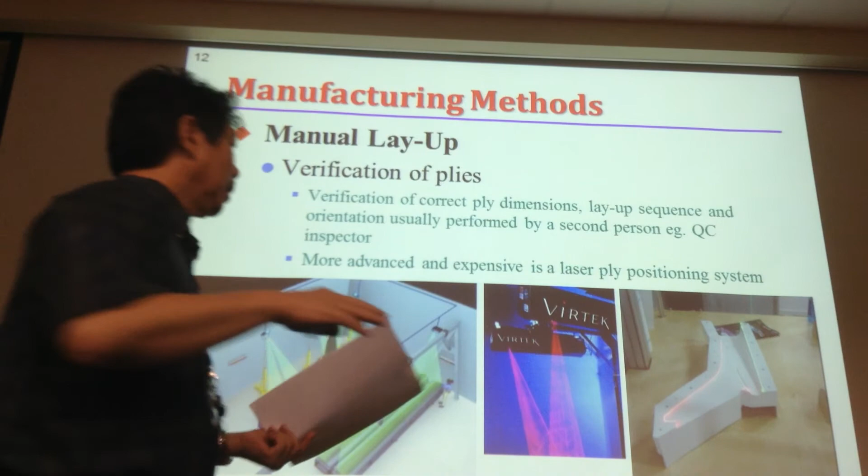And then if the factory is even more modernized, they may use a laser to guide you. It's like drawing a line there, but not a permanent one. It just gives you the line in light, and then you can orientate the part. This one they use in the construction industry also. It's very strict in the aerospace industry.

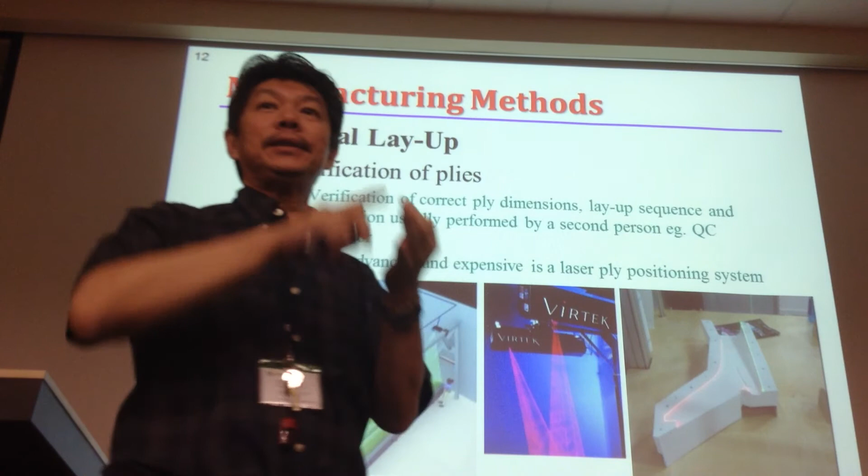Even the glue they have, all must be approved. The scissors they use must also be approved by Airbus or by Boeing. And then the glue, even a brand new one in the store, the shelf life is very short. After they reach the shelf life, if it's not used, dump. Unused one, dump. Very strict.

What happens if this guy certified that everything is fine? Then he will make the signature. He will have a special personal stamp, he will stamp. I mean, he approved it, and then the plane came down, and that portion was certified by him.

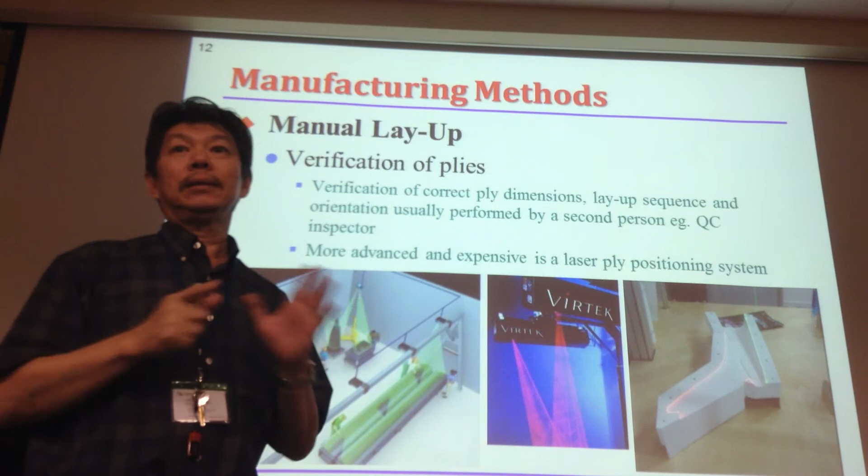Then he's liable to be charged even if he leaves the company, within 7 years. Within 7 years, if something happened to the plane because of his negligence, he's liable to be charged. Even if he had left the company already, still liable. So no joke. That's why they are quite well paid. Any question?

Okay, but if you have a part that is very big, if you have a small bathtub, you can do it manually. But if you have a part like a wing, and you saw how big the wing was in the video last week, it can park 70 family cars on one wing.

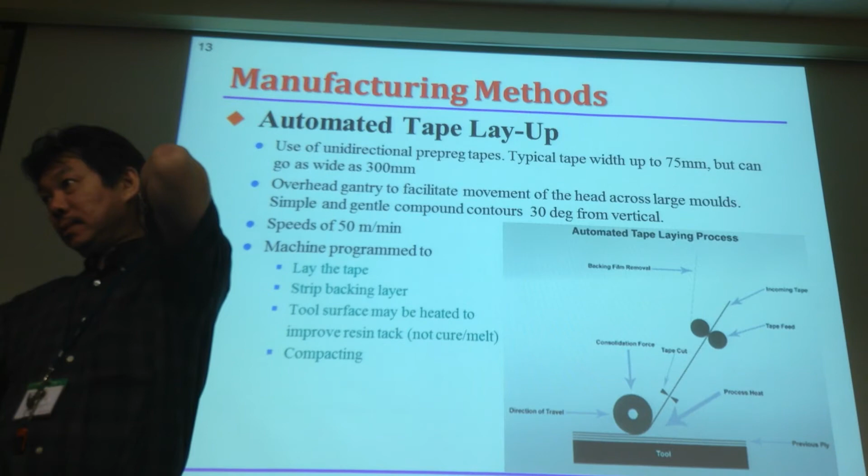Without spilling over - parts of the car standing close to the edge. No, I mean just roughly, just a rough guide. Okay, if you use manual lay-up, it's quite tough, isn't it?

Have you all tried putting this screen protector on your handphones? Is it easy? Small one quite easy, but the 10 inch one, wow, very tough already. You put bubble here, bubble there, and after you take it out again it's worse, the dirt gets inside.

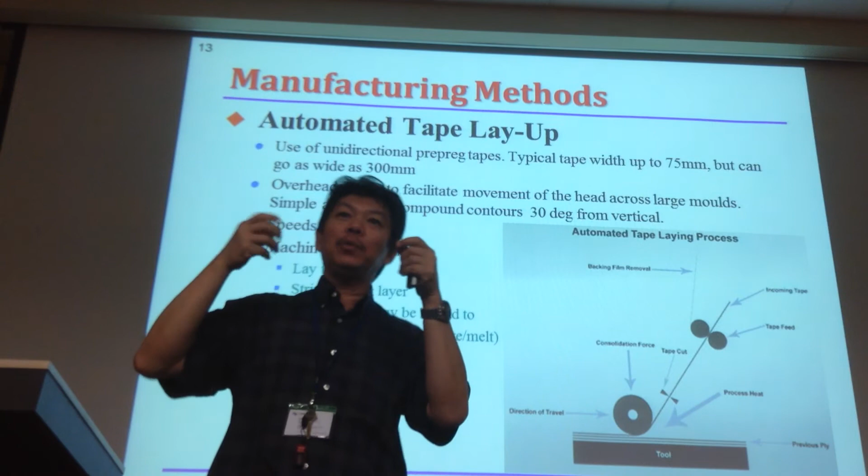Same with lay-up - if you do manual lay-up and you find something is wrong, you tear it out and all this, very difficult.

So they use a machine, similar working mechanism to your erasing tape. When you use your erasing tape, you erase from left to right or right to left - mostly left to right because you are right-handed. If you're left-handed it's the other way around, right to left.

But can you go backwards? When you use your erasing tape, once you go through, you cannot clear it again - can you go backwards? No, cannot. Same thing - the machine can only go in one direction, exactly the same working mechanism as your erasing tape.

Use of unidirectional pre-preg tapes. Typical tape is 75mm, but can be as big as 300mm. Just lay it - overhead gantry to facilitate movement of the head to a large mold. Simple and gentle contour, 30 degrees.

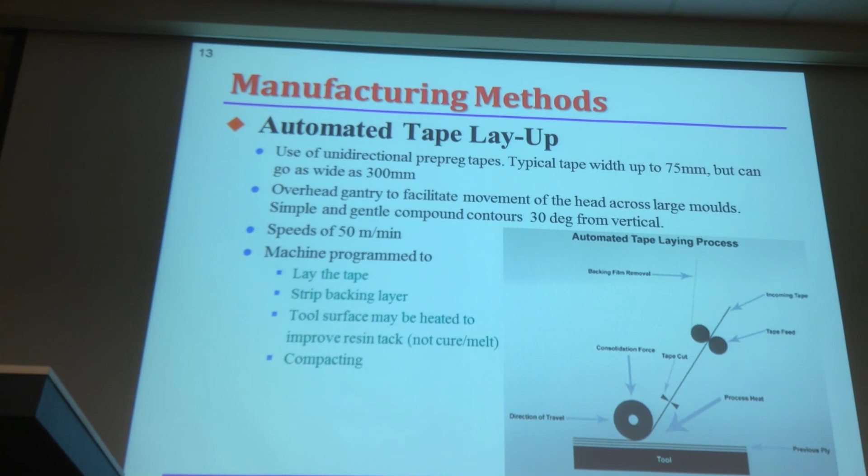This is a smaller one. Tape lay-up - does it look like your correcting tape, erasing tape? She's taking a selfie.

So of course it's very good if you can use it. It's good for large, long, flat components like wings and rotor blades.

Compared to the time required for manual lay-up, materials become an issue when the task is nearly at completion. If you do manual lay-up and take too long, by the time you finish the last few pieces, the earlier ones are almost cured already.

Then there's a risk it may happen and you may scrap the whole structure. With automated lay-up, it will not happen - it's good. But consistency and repeatability you can always get because it's done by program.

Disadvantages: expensive machines, need to program the machine, and you basically need large volume quantity. But for the wings, no choice - you may not have a large quantity for wings because you may only build 1-2 planes. You may not have the volume, but for a big job, yes.